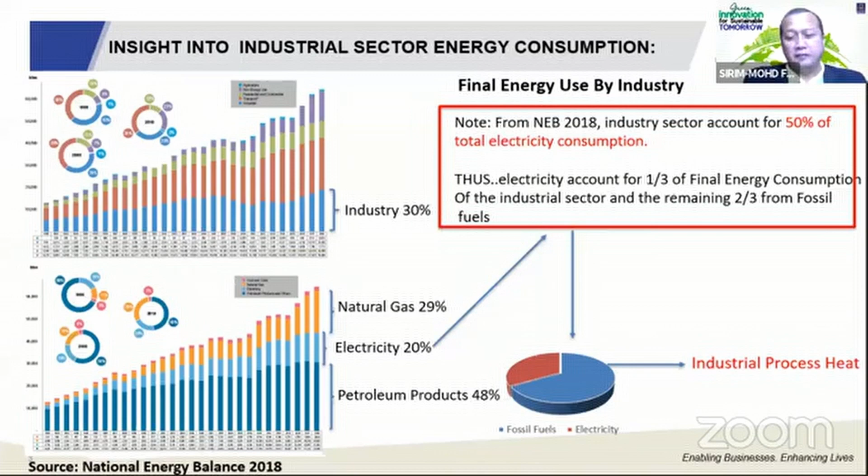Ladies and gentlemen, at the Industrial Centres of Innovation in Energy Management, we offer comprehensive energy solutions that enable industry players to progressively decouple fossil fuel into green energy. This will in turn save your energy bill and contribute to CO2 emission reduction and promote a green economy.

Ladies and gentlemen, our initial engagement with industry begins with a comprehensive energy audit exercise. This is a very important step to be undertaken right from the beginning. At this point, our technical team will do energy measurement and analysis for a period of at least 7 days, where we log our power analyzer at the main supply board, sub-supply board, and specific equipment to monitor energy demand and profile throughout the week.

We also do assessments of thermal energy supply, such as boiler and heating elements, and look for process optimization. The results allow us to identify significant energy users, energy apportionment, and losses based on major equipment and facilities. And then we propose energy saving measures.

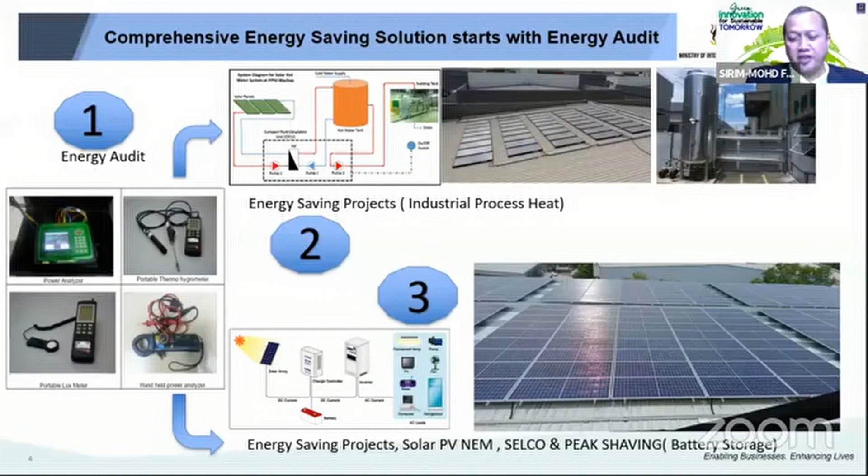So our technical team will assess your demand for electricity and thermal energy, undertake design works, and propose a solution that suits your factory conditions and budget. This is our first job, to carry out energy audit.

Similarly, when applying thermal energy supply, for instance from a boiler, we ascertain energy losses during combustion, energy losses during conveyance of steam, and final losses in the final process, in this case drying of wood, and at the return condensate. Thus, the effective thermal energy demand at the process level can be satisfied. This is very important the moment we want to integrate a solar energy solution into the process.

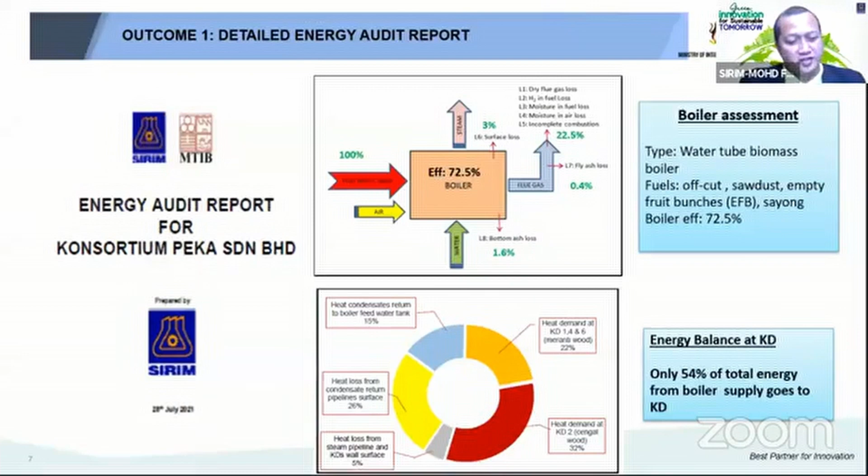Ladies and gentlemen, let us understand process heat demand of various subsectors. This analysis is taken from the National Energy Balance Report in 2016. The figure is very much the same from year to year, even until today, and the trend is almost quite the same. These are the main industrial subsectors that contribute to high energy consumption within the industry.

The bars on the left indicate the types of fuel used by different subsectors. The yellow refers to electricity, while the brown and orange basically are petroleum-based fuels, and normally they are used for process heating.

In these three subsectors, the one I put there, and moving to the right, another chart there: chemical, transport and machinery, and food and beverage. We observe high energy consumption for process heating associated with low temperature. When I say low temperature, if you look at the graph on the right-hand side, those having yellow color - this is temperature normally 100 degrees and below.

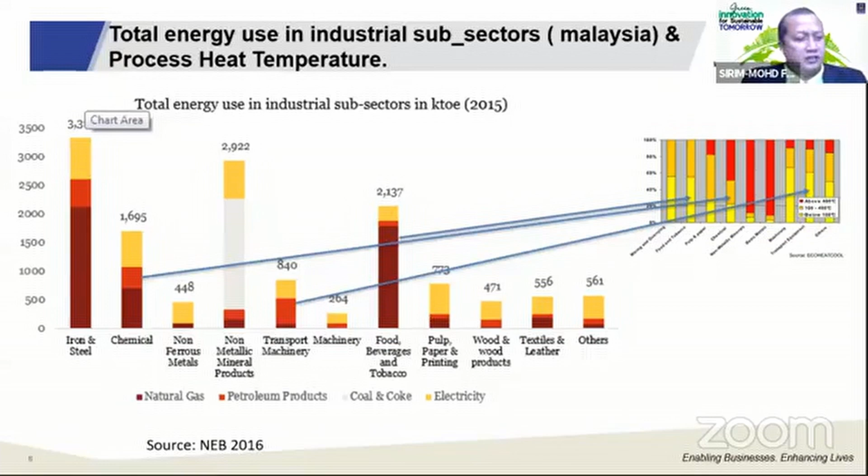This process, 100 degrees Celsius and below, can easily be met by solar heating - a topic that I want to talk about a bit more later.

For instance, in the food and beverage industry, heat is utilized in many industrial processes. Sterilization of food is carried out at high temperature to kill all the bad bacteria. Similarly, pasteurization of milk is done at certain temperatures below 100 degrees Celsius to maintain its freshness and ensure it's free of bad bacteria. Boiling of water in the food industry is common. Hot water is used for preparations in cooking and cleaning in general to maintain certain hygiene conditions.

For instance, in poultry processing, hot water is used in the scalding process. This is where slaughtered chickens are submerged into hot water for a period of about 2 minutes to ease the defeathering process afterward.

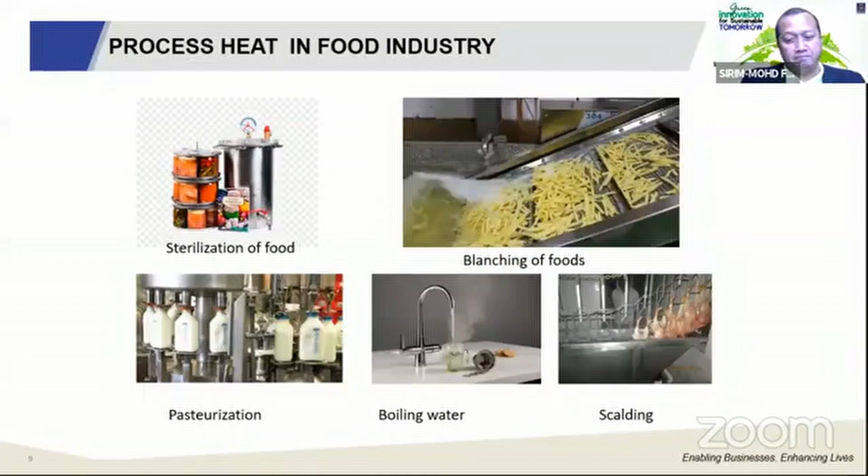The question is, can solar process heat meet industrial process heat demand? Can solar do the job for the industry players? That's the main question, perhaps, because perhaps many of you have not seen how solar can meet industrial process heat.

You will be surprised to know that solar energy, or solar thermal technology, can provide heating from low temperature, 50 to 60 degrees Celsius, right up to 450 degrees Celsius. At 450, you can do lots of things. For low temperature heat, we can utilize standard flat collectors. For medium temperature heat, we can use evacuated tube collectors, whereas for high temperature applications, we can utilize concentrated solar in the form of parabolic trough or Fresnel collectors.

The real challenge is how to do this integration into your existing energy supply system in your factory, in the industry. Based on our study, these are potential industrial subsectors to benefit from solar process heat because of their temperature requirement: food and beverage, pulp and paper, rubber glove, hotels and hospitals.

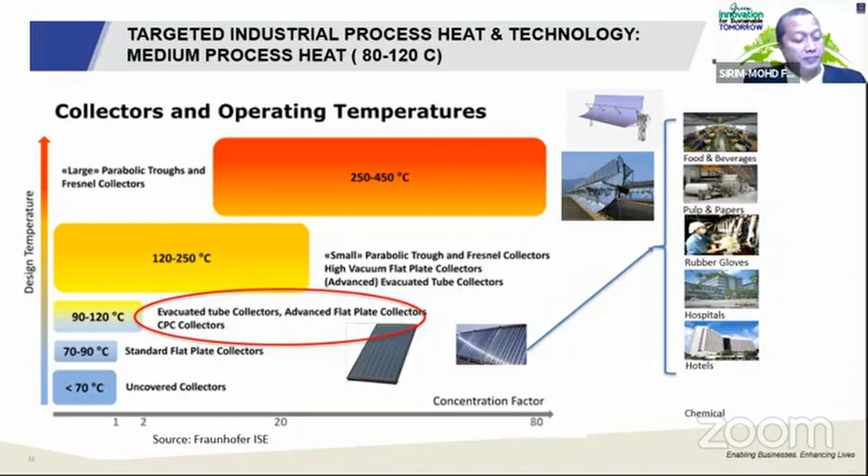When we undertake this solar thermal project, we started with these simple steps. Identifying energy demand - that's very important. By doing this mass energy balance, we do some measurement aside, and some calculation based on certain energy principles. After that, we design hot water storage capacity according to the energy demand at that particular process. Later, we design a proper heat exchanger to ensure optimum heat transfer.

We ensure that we get the right temperature at the process required in the industry, and finally, we determine the solar collector area needed to meet the energy demand. This is all done using software called T*SOL.

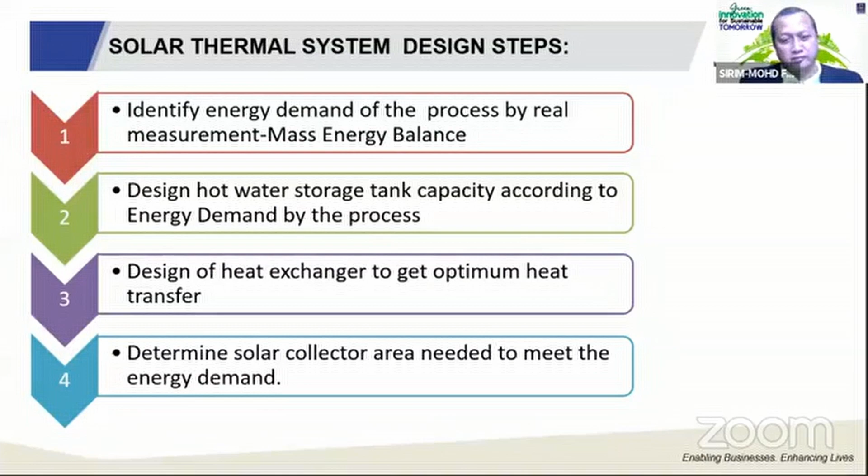Ladies and gentlemen, this is indeed the first industrial scale solar thermal plant installed in the country - the first one in the country, for a poultry processing plant. It serves as a demo plant to exhibit how the technology works, and also serves as a platform for sharing knowledge and disseminating information to industries and the public, like what I'm doing today.

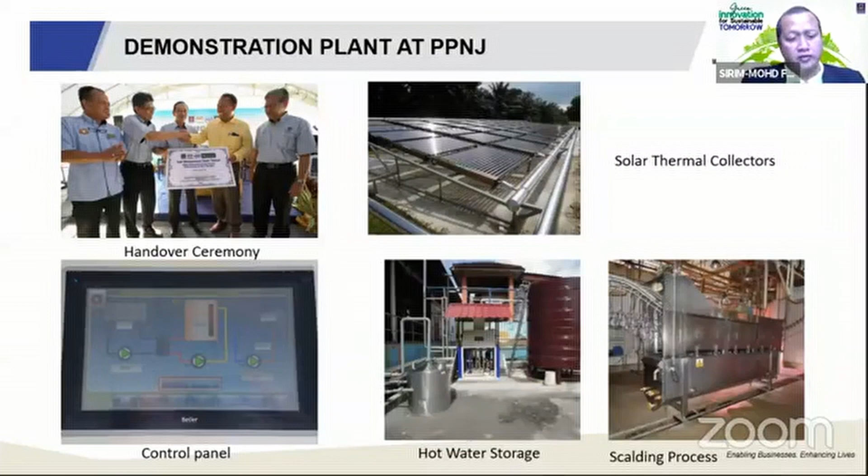The project won the National Energy Award in 2018 and also won ASEAN first runner-up under the off-grid thermal category. As I said earlier, this is the first project at the industrial scale taken by SIRIM. We don't stop there - we continue to do more and more projects for industry to prove and demonstrate how the system can be applied at various industries.

For instance, this is another example, a project by SIRIM for F&B. The process here is required for food preparation. The company managed to reduce LPG consumption when partial heat is supplied by solar heating.

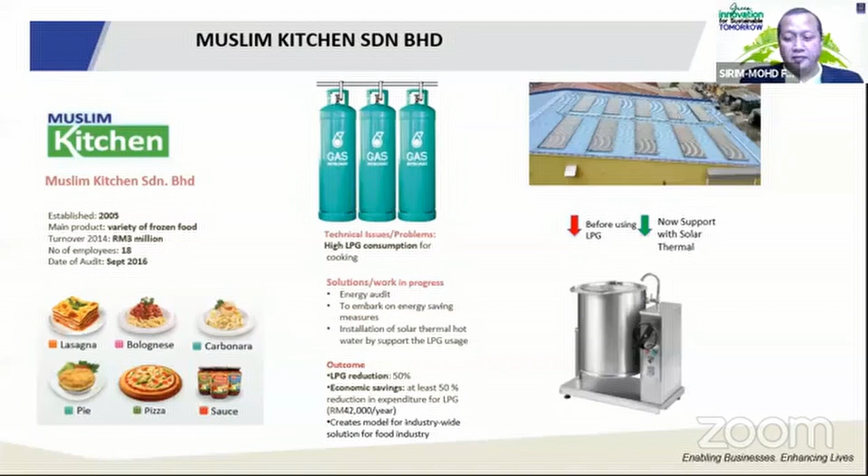This is another successful project where we utilize heat for sterilization of beverages. Sterilization doesn't require high temperature, so instead of getting heat from steam generated by electricity, we propose a solar solution, which is much more cost-effective and greener.

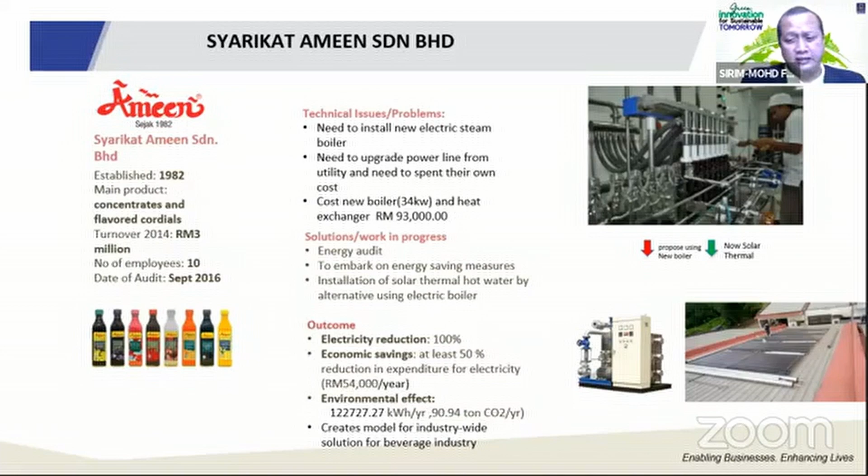This is another example, a company utilizing solar hot water for beverage preparation. Puan Farah will share a bit more later in her session about how this technology helped them save energy and grow her business.

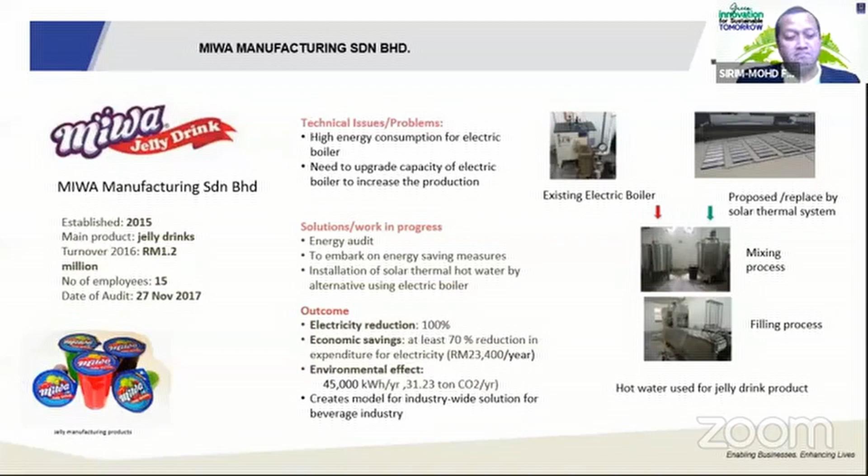Some hot water is used in food preparation. In the case of Ever Delicious, a company that makes cookies and biscuits, they use hot water for cleaning molds. In this kind of factory, you keep changing molds, and in the biscuit industry, all the molds end up with margarine and butter residue that's not easy to clean, so hot water provides a perfect solution.

In the past, the company relied on LPG gas to provide hot water for cleaning purposes, but nowadays 100% of their hot water comes from solar. So another successful project.

After the first success in the poultry processing plant, we also completed another large-scale project in Johor, supplying hot water for the scalding process in chicken processing. The collector area stands at 500 square meters, installed on the rooftop, with a thermal storage tank accommodating up to 25,000 liters, or 25 cubic meters, at 85 degrees Celsius. These systems ensure enough hot water supply for the scalding process throughout the day.

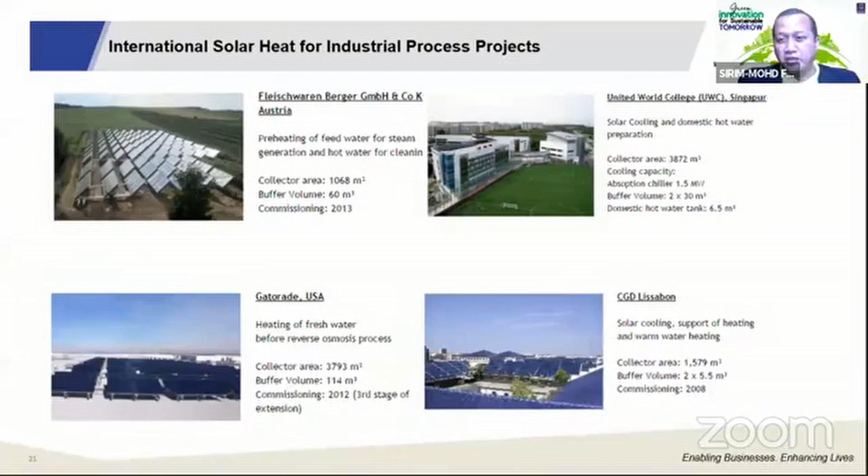I'm also sharing some international projects where solar heating is used in a meat processing plant in Austria - I've been to this plant - Gatorade in the USA, a beverage company, and also solar cooling. This is another application, for commercial buildings, such as in the United World College and also CGD Lisbon.

Ladies and gentlemen, the second energy solution to embark on, when we talk about electricity and energy, is to basically embark on solar energy storage and IoT systems to achieve smart energy management. This is the era of digitalization of energy management.

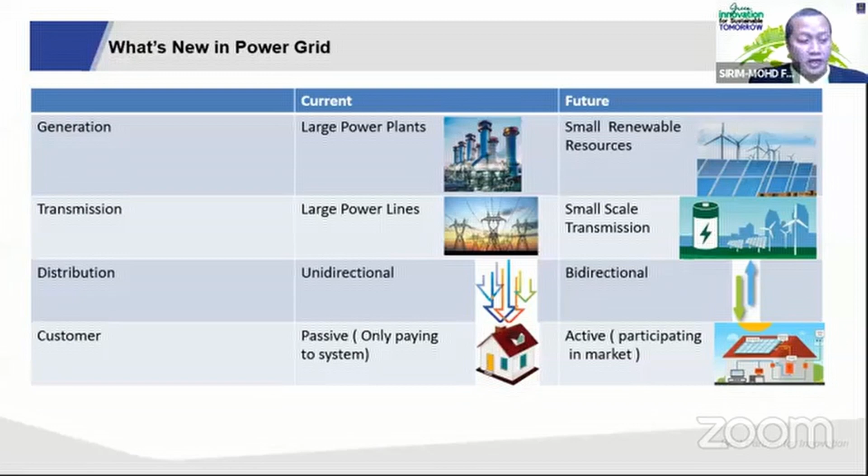With the advancements of digitalization in the power sector, power grids will be smarter and capable of allowing bidirectional flows of electricity and information from utility to consumer. Not only that, the grid is becoming more prepared to accept more renewable energy, including energy storage.

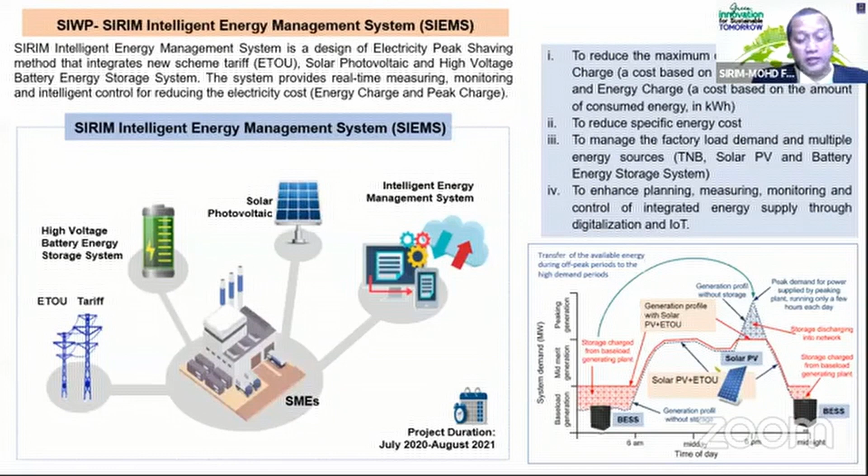The next project we did was the SIRIM Intelligent Energy Management System, where we employ solar PV, energy storage, and intelligent energy management, where we can achieve savings through reducing maximum demand and peak shaving.

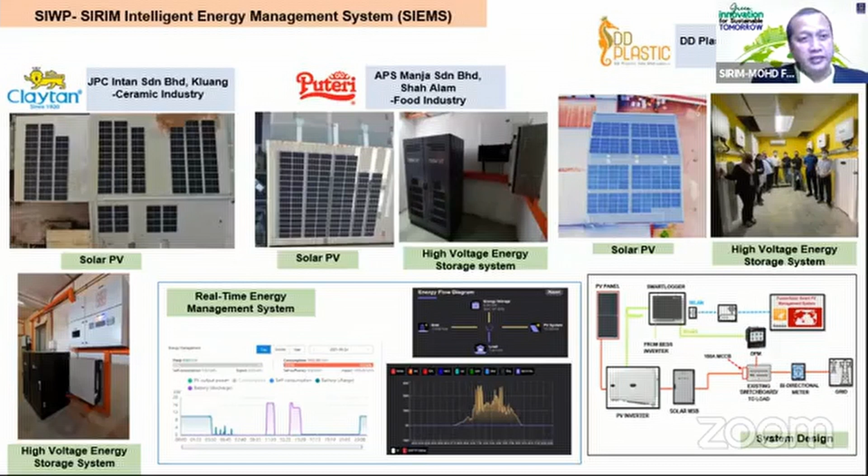These are some of the projects I'll highlight very quickly that we did - real projects at three different companies: JPC Intan Johor, APS Manja, as well as DD Plastic.

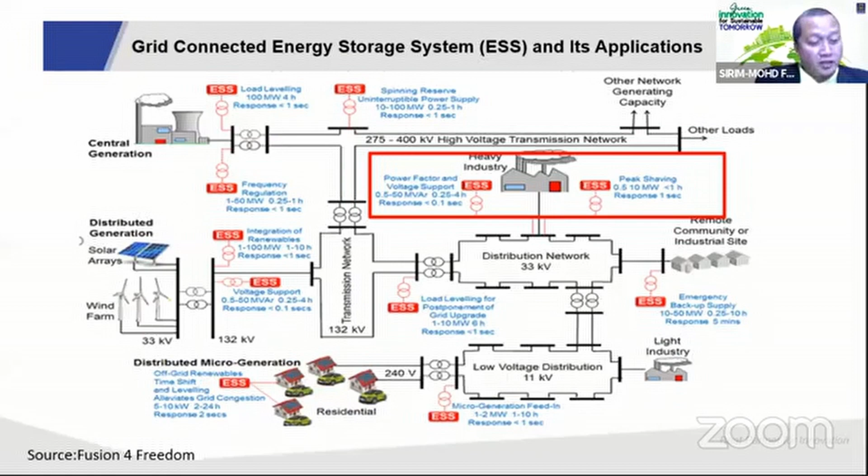What's next is that the next major development and game changer in energy management is people like you and me beginning to appreciate the role of energy storage. This is very important. To make it short, energy storage enables us in two ways: to improve power quality and reliability, and second, retail energy time shifting.

With energy storage, you can embark on new tariffs, for instance like ETOU, where previously without solar PV, without energy storage, you cannot do that because this is demand response. And then you can achieve more cost saving.

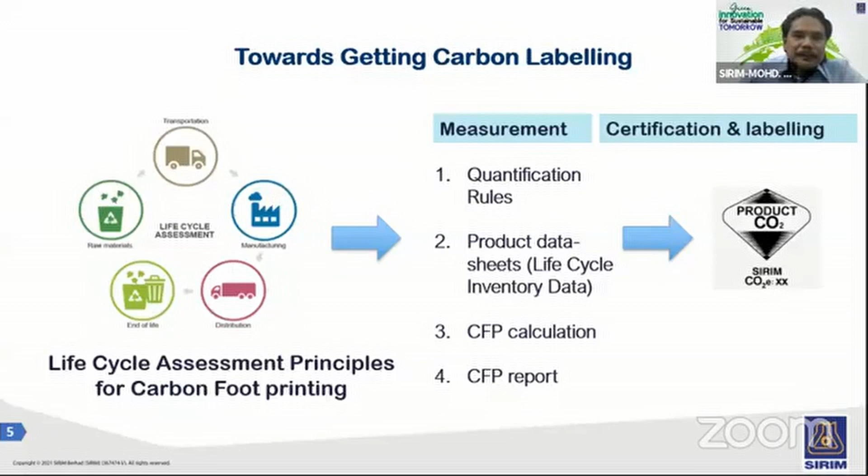For product category carbon labeling, first we have to develop the standard called product category rules. This standard is developed under SIRIM STS. If you want to apply for carbon footprint for your product, you can refer to this website to check whether the product category rules are already established for your category. If not, you can propose or request SIRIM QAS to develop new product category rules for your category.

After we develop the product category rules, for the calculation there are two types of data. The first is inventory data from your actual process, and the second is background data. For background data, we normally refer to MYLCID, the Malaysia Life Cycle Inventory Database.

This database was developed in 2010 under RMK9, and there are more than 170 life cycle inventory datasets available for public access. For the calculation, we normally use the SIRIM carbon calculator, developed by my section, the Environmental Management Section. This calculator is developed based on ISO 14067 requirements and IPCC guidelines to standardize the calculation and emission factors used in CFP calculation.

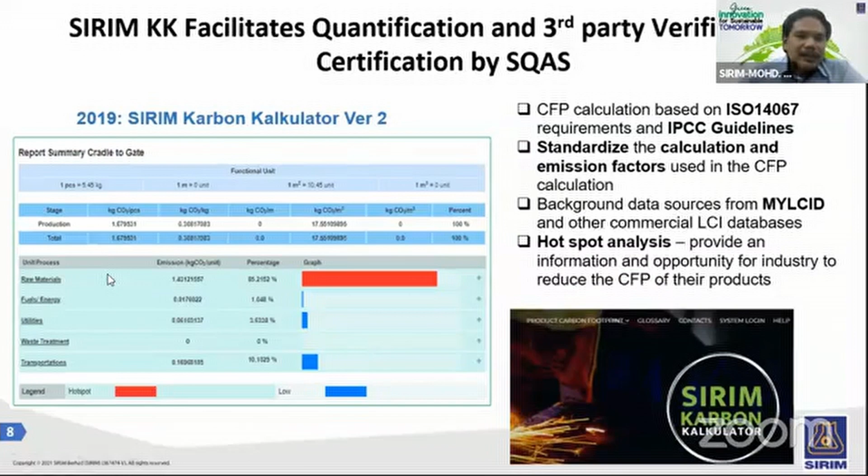From the result of the calculation, we can prepare the report. This is an example report for ceramic tiles, where we extract information and result charts from the SIRIM carbon calculator to embed in our report, then tell the client or company which area should be improved in the future.

Besides carbon footprint for the product, we also provide GHG accounting and reporting at the corporate level. For example, if we want to show the public that we are focused on green practices, we tell them we are in the process of reducing GHG emissions from our company's operations in a particular year. We can use this corporate reporting for GHG emissions, and there are several benefits.

For example, cost saving, because GHG emissions are related to fuel consumption and combustion. If you try to reduce GHG emissions, it also indirectly reduces fuel consumption and fuel combustion. You can also use this as a branding tool for your company in terms of environmental responsibility.

Okay, just now we heard about energy management and also scheduled waste management. So cost saving can be done through energy management, scheduled waste management, and also another option through technology intervention, such as heavy metal recovery from wastewater treatment plant.

The wastewater treatment plant is normally the most difficult and unprofitable - it doesn't generate income, it consumes a lot of money. So we need the right technology approach to reduce the cost of disposal of the sludge. This can be done through a technology called the crystallization process.

This crystallization process will create a byproduct that we can sometimes recycle, and also reduce the disposal cost. Recently there have been many news about river pollution and contamination due to heavy metals, such as the contamination and water pollution in Penang. You can see leachate come out untreated, discharged from landfills, along with solvents, heavy metals, and sometimes cyanide. Heavy metals such as zinc and cyanides are colorless and have no smell, so it's very difficult for us to detect.

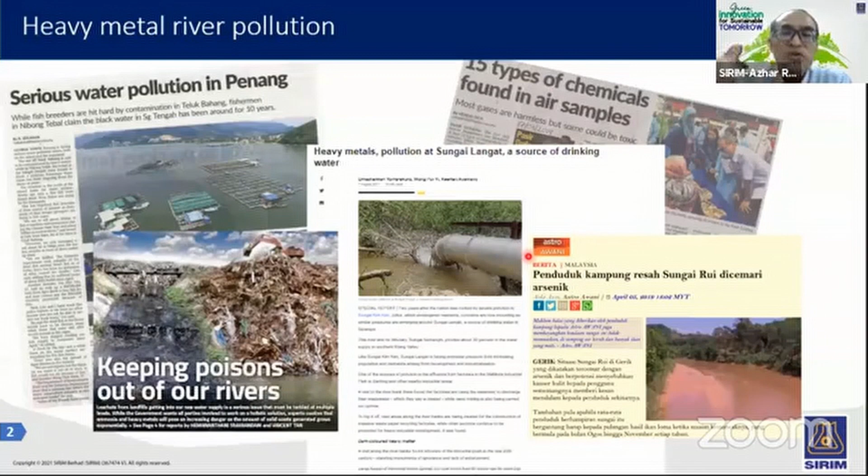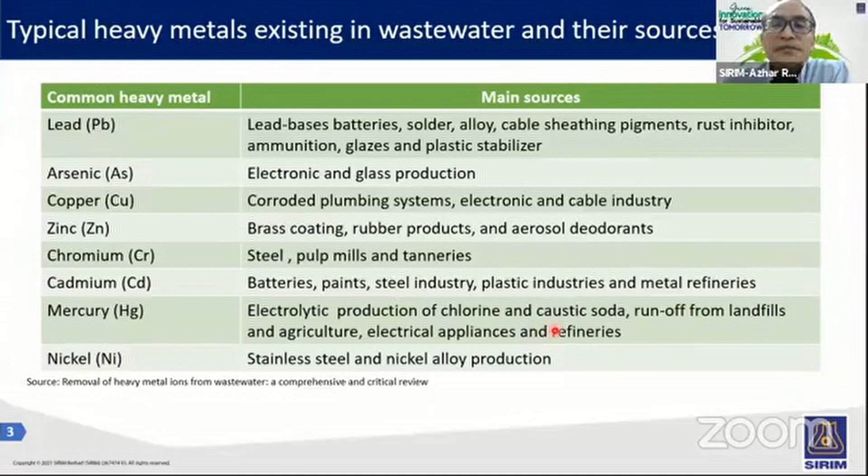So currently, the common process we use to handle this wastewater is the standard physical chemical process to remove heavy metals. This method requires a significant amount of chemical and produces a large amount of sludge. This sludge needs to be sent to Kualiti Alam for safe disposal.

Even after dewatering, the moisture content is still high, in the range of 50 to 70%, and normally you get a huge, larger footprint. This sludge is categorized as code SW204 - it contains inorganic constituents, metal, and organic materials, so it needs to be sent for containment. Just imagine the sludge has a water content about 70% - we're just paying for water, not for heavy metals.

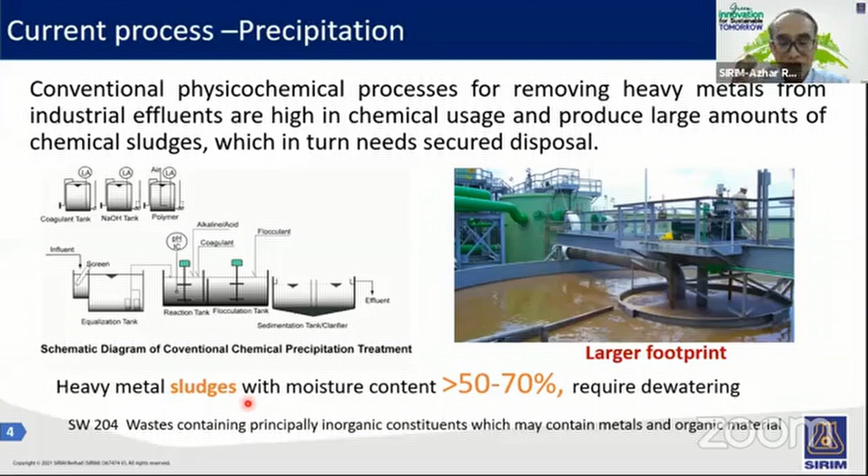Alternatively, at SIRIM we have developed an innovative solution to overcome this problem. Unlike the previous technology, we call this the crystallization process. This process does not produce sludge - it produces pure granules of metal carbonates or sulfides, depending on the complexity of the water.

Sometimes this granule can be recycled back directly to the factory, or we can dispose of it - it depends on the complexity of the wastewater. Some wastewater contains many kinds of constituents such as chromium and cyanide mixed together, so it's very difficult to recycle back, but for a single component it's very easy to do that.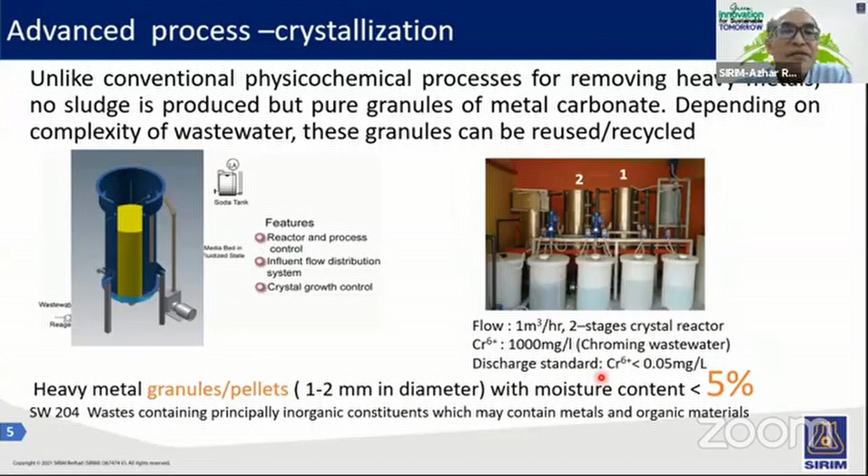So if we compare the two processes in the next slide, in the conventional process we look into the byproduct composition, mostly containing water, about 70%, as compared to the crystal process where only 5% moisture, with the rest being heavy metal.

So let's look at this slide. In the conventional process, you need a very large footprint and it's very costly to dispose of because of the high water content. The product is non-recyclable and has to go through special waste management, though some can be recycled back.

And if you look at the advanced process, it is a single column with a small footprint and very little water, and it can be recycled.

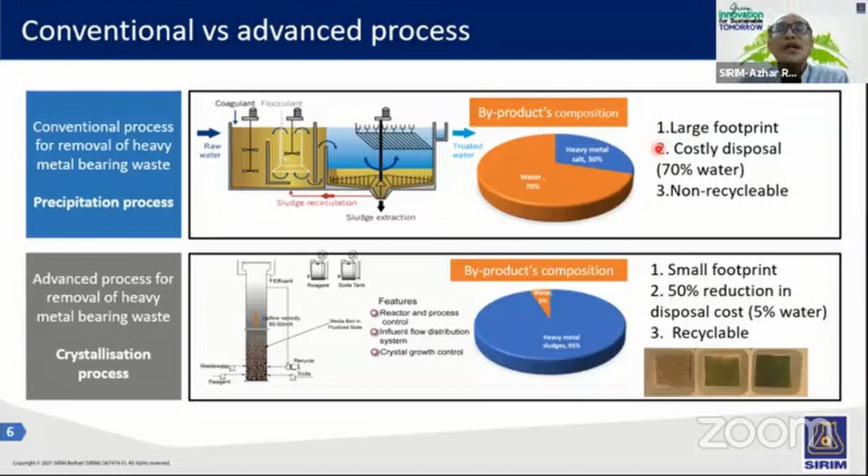So let's look into the case study. We took samples from a rubber factory and did a simulation in our lab. In acidic latex wastewater from the rubber industry, normally there is a lot of zinc, with concentrations ranging from 350 to 1,500 ppm, averaging about 800 milligrams per liter.

The process uses a lot of water, on average about 500 cubic meters per day. Comparing the conventional and crystal processes, the conventional process has about 65% moisture, and the recovered zinc sulfide sludge is about 1.7 tons per day, compared to less than half that for the crystal process.

So per year, total sludge generated is about 520 tons for the conventional process, and about 160 tons for the crystal process.

Adding up all the costs, the disposal cost for zinc is roughly 700 ringgit per ton, plus logistics cost, totaling about 780 per ton. Altogether, the disposal cost is about 400,000 for the conventional process, compared to about 150,000 for the crystal process, saving around 250K a year for this size of factory.

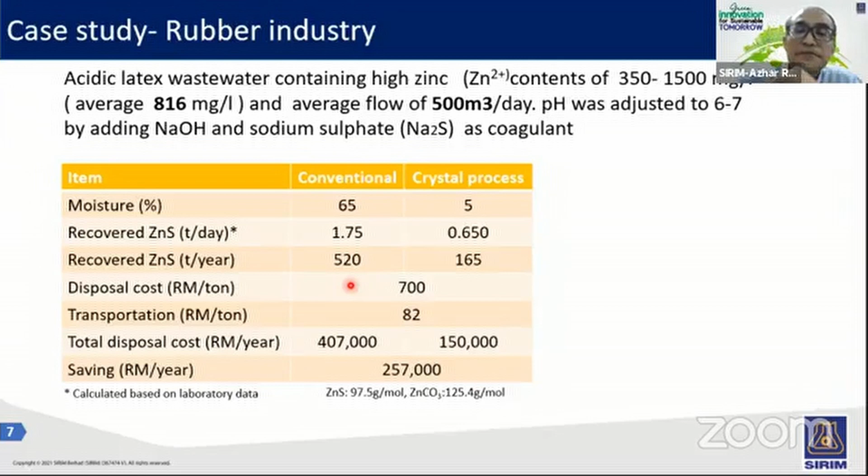As for the capex, for the crystal process it depends on the nature of the wastewater. It can be the same or slightly higher capex, while OPEX is more or less the same.

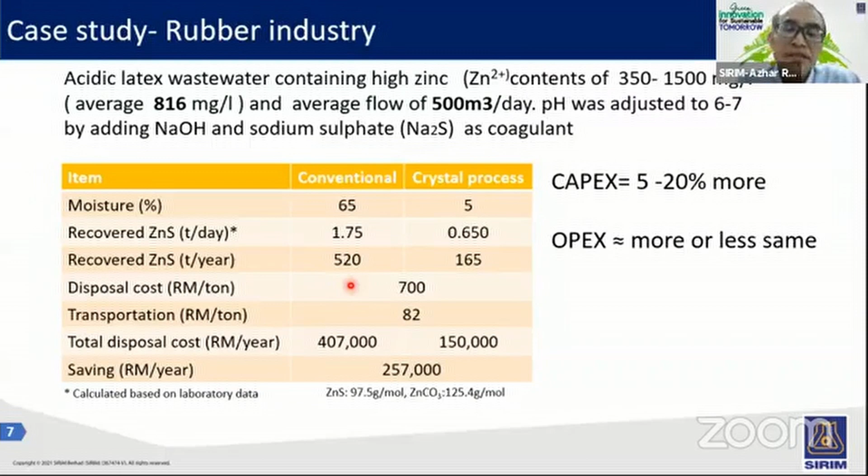This reactor concept can be applied to many industries: electroplating, electronics, and even recovering precious metals, arsenic wastewater treatment, water softening to remove hardness like calcium and magnesium, and recovering phosphate fertilizer from sewage or other phosphate sources, as well as semiconductor and ferrite-containing wastewater.

Another 3 minutes, Cik Azhar. Okay, all right, almost finished.

We can repurpose the existing plant by doing retrofitting or process optimization. The cost depends on the size, roughly 200,000 onwards.

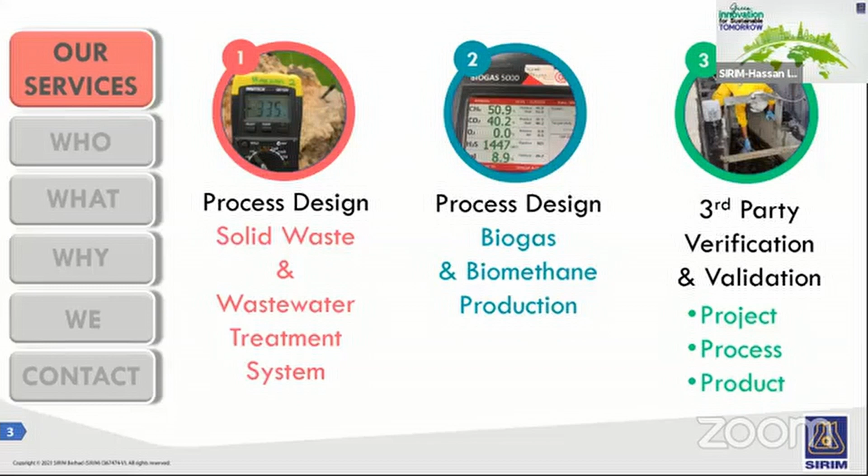While it is a goal of SIRIM to offer its support for all industry in Malaysia, we reckon that project funders, project developers, clients, contractors and industries currently facing problems with wastewater or waste are the parties that will benefit the most from IC BioNG tech sharing and technical services.

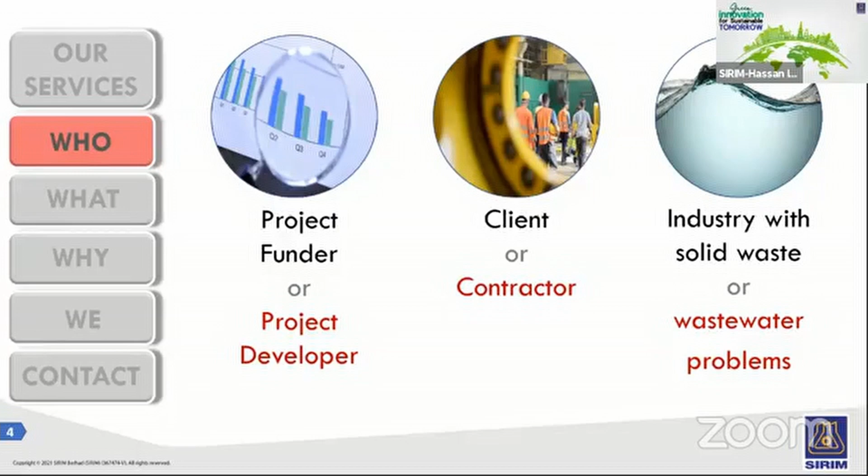For funders, a funding proposal submitted to you might contain all the numbers that look promising on paper with an acceptable payback period. However, in real life, the reality could be different. For example, we have seen a feasibility study report which used a specific methane conversion yield of 0.35 normal cubic meter methane per kg COD removed at 39 degrees Celsius.

Normal cubic meter refers to condition at 0 degrees Celsius and pressure at 1 bar, while the ordinary 1.5mm HDPE dome pressure is negligible since it requires only less than 0.3 mbar to be fully inflated, or max 0.5 mbar for aesthetic reason.

Bankers, don't worry with the jargon. The easy explanation is the methane production was overestimated by 14%. That is just one variable and it's already accounted for 14%. There are several other variables that contribute to the final yield, and just imagine the resulting value if all the factors are compounded.

Don't worry, please do not rate them as high risk yet. We are still here and available to provide you the peace of mind you need, knowing that SIRIM is readily available to come to the table as an independent third party to assist you in determining the level of risk possessed by a project, so that you can make the difficult investment decision.